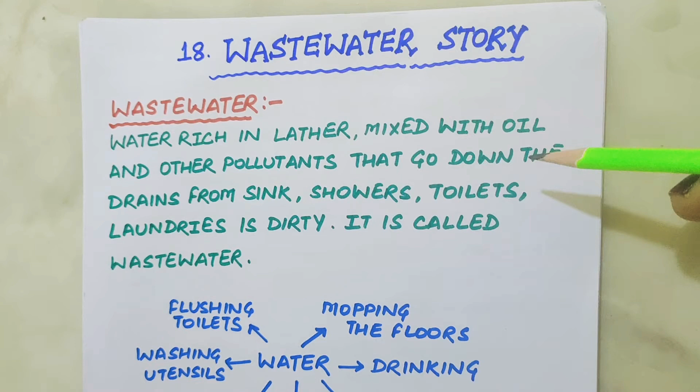Good morning, everyone. Today we are going to discuss chapter 18 of your science book, Wastewater Story.

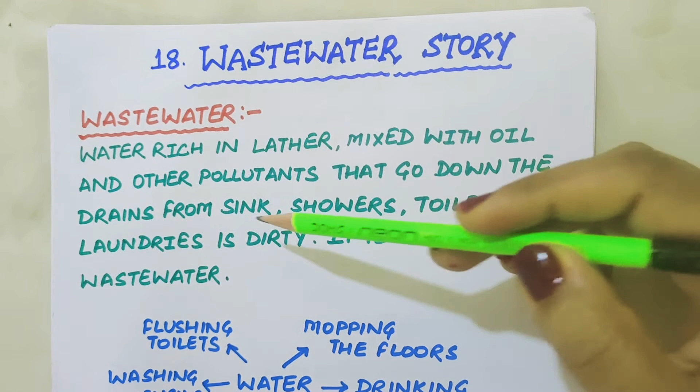As you know, water plays a very important role in our life. We all use water, and in the process of using it, we make it dirty. The water rich in lather mixed with oil and other pollutants that goes down the drains from sinks, showers, toilets and laundries is dirty, and it is called wastewater.

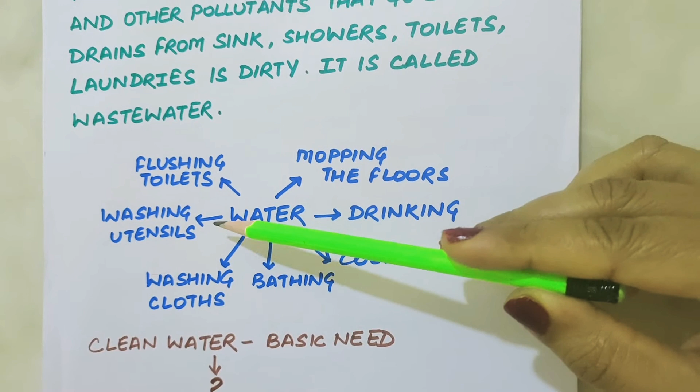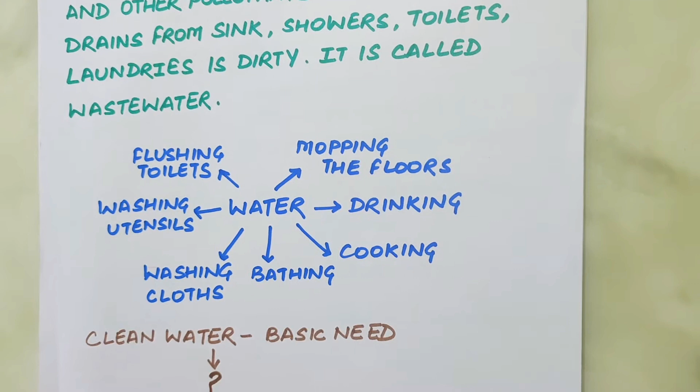We use water every day for drinking, bathing, cooking, washing clothes, washing utensils, flushing toilets and mopping. We cannot think of our life without water. We use lots of water daily, which is passed on to the drainage system every day. Water is needed by all forms of life, and clean water is a basic need of human beings. But unfortunately, clean water is not available to a large segment of the human population.

The water which is unfit for human consumption becomes the source of many waterborne diseases, which ultimately leads to loss of human life. It is estimated that 1 billion human beings do not get safe drinking water. So, realizing the urgency, we celebrate 22nd March as World Water Day to bring awareness amongst people for safe water which is fit for human consumption.

On World Water Day, that is 22nd March 2005, the General Assembly of the United Nations proclaimed the period 2005 to 2015 as the International Decade for Action on Water for Life. All efforts made during this decade aim to reduce by half the number of people who do not have access to safe drinking water. So, cleaning of water should be done before it is used again.

So, what do you mean by cleaning of water? It is the process in which the pollutants are removed from the water before the water reaches a water body or before it is used again. This process is also called sewage treatment.

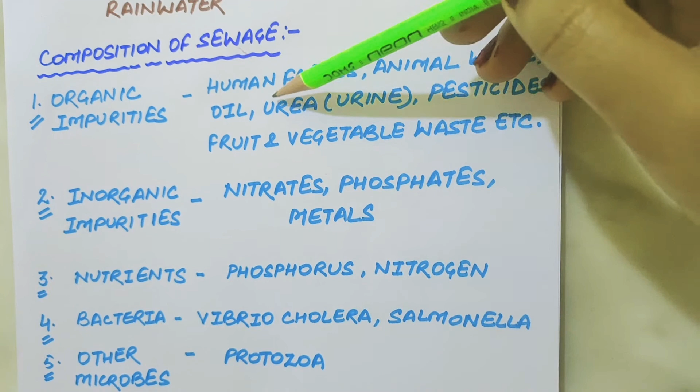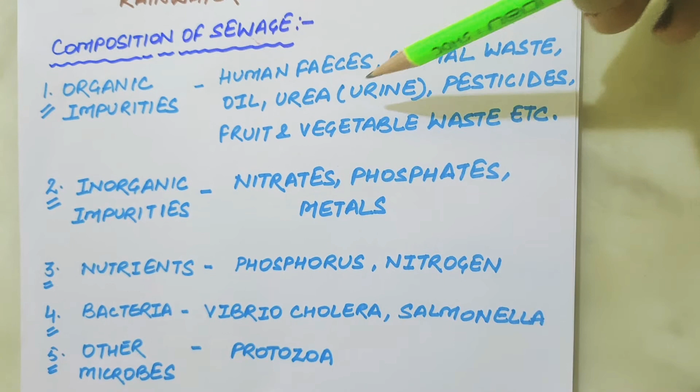Let's have a look at the composition of sewage. The following components make up sewage. The organic impurities present in sewage are human excreta, animal waste like animal dung, urea as present in urine, oil, fruit and vegetable waste, pesticides and herbicides. The inorganic impurities present in sewage are nitrates, phosphates and metals.

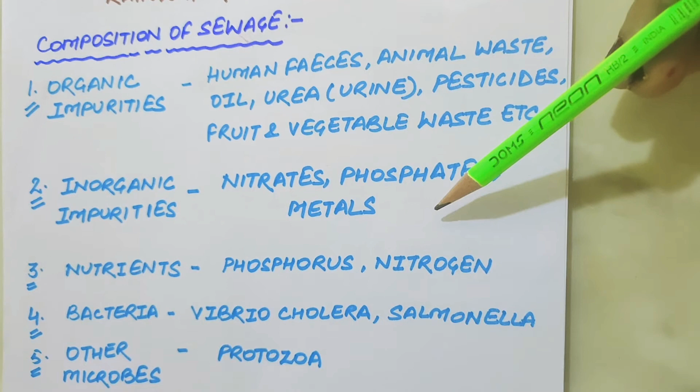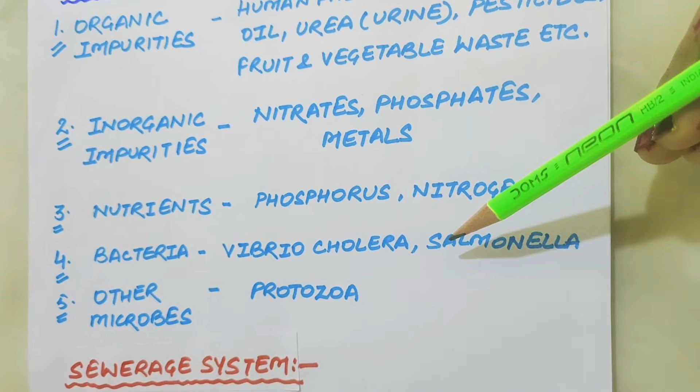The nutrients present in sewage are phosphorus and nitrogen. The bacteria present in sewage include those bacteria which cause waterborne diseases such as cholera and typhoid. Other microbes present in sewage are protozoa, which cause a waterborne disease called dysentery.

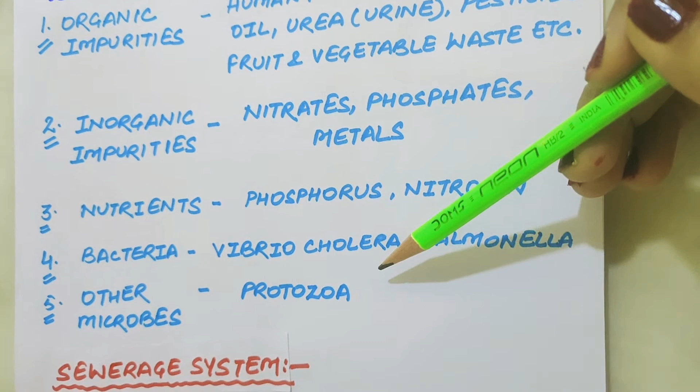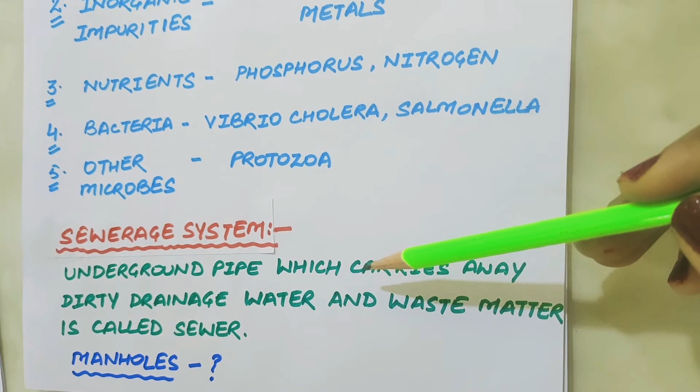Do you know what a sewerage system is? In a house there are generally two sets of pipes. One set of pipes brings clean drinking water into the house and the other set takes away wastewater from the house. For proper sanitation, a well-maintained sewage system is required.

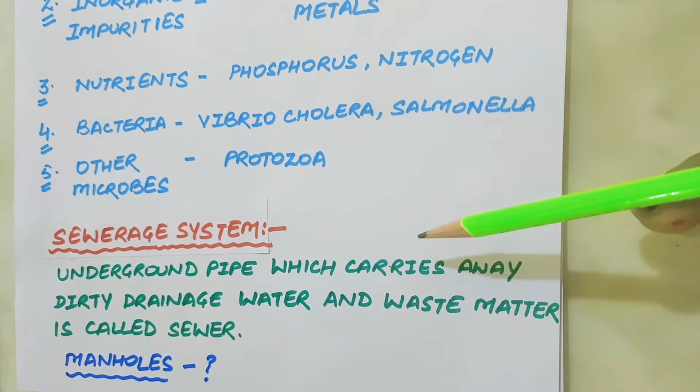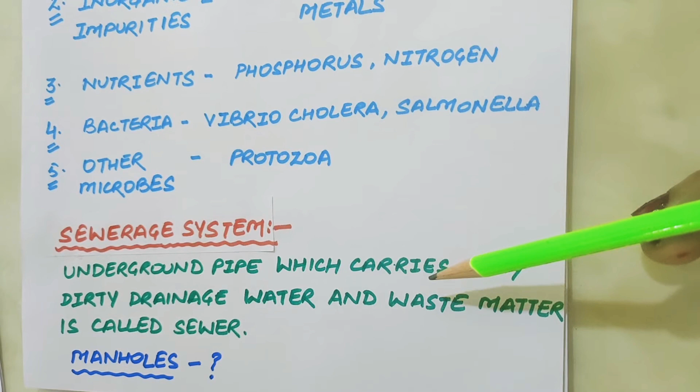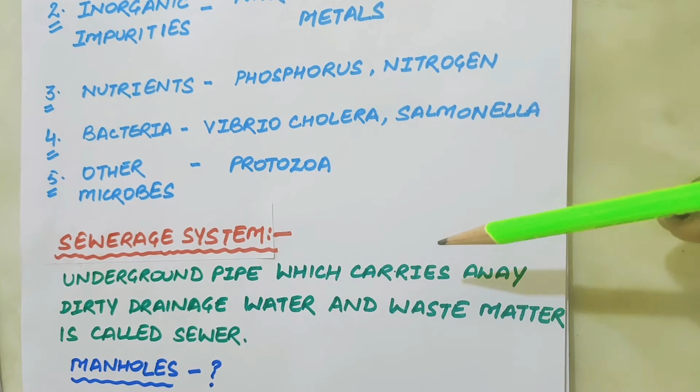The pipes which carry away wastewater or sewage from houses and other buildings are buried under the ground. An underground pipe which carries away dirty drainage water and waste matter is called a sewer. The provision of drainage at a place by laying sewers under the ground is called sewerage. Actually, sewerage is an underground network of interconnected pipes called sewers that carries the sewage from the place where it is produced to the sewage treatment plants where it is processed.

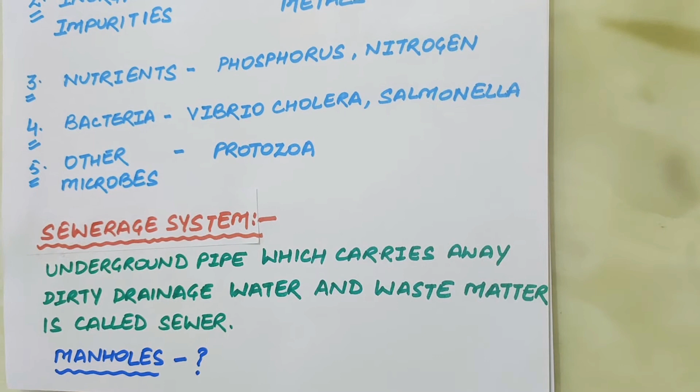Do you know what manholes are? A manhole is a covered vertical hole in the ground, pavement or road above the underground sewer pipeline through which a worker can go down to the sewer pipes for inspection, cleaning, etc.

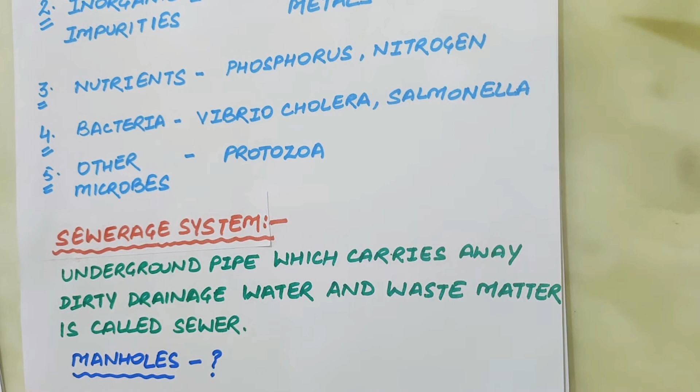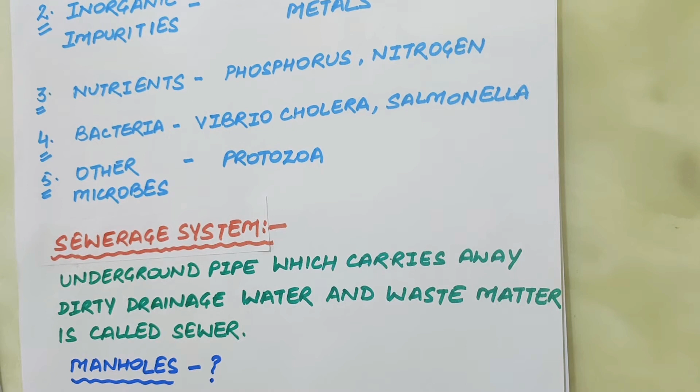Manholes are provided at every 50 to 60 meter distance in the main sewer pipelines. Manholes are also provided at the junction of two or more sewers and at points where there is a change in the direction of the sewer line.

Treatment and processing of wastewater is done in a WWTP, that is, a wastewater treatment plant. By performing a simple activity, we can understand the processes that take place at the wastewater treatment plant. We will take a glass jar 3/4 full of water, in which we will add some dirty organic matter, and label it as before treatment sample 1.

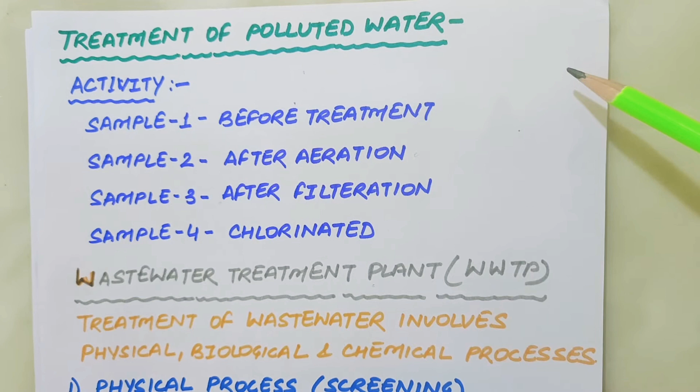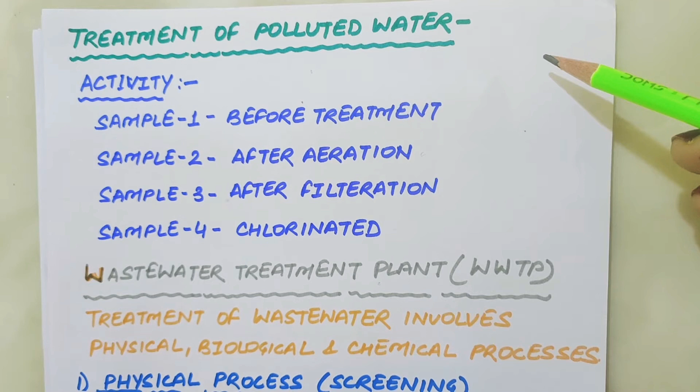In the next step, we will use an aerator from the aquarium to bubble air through the sample in the glass jar and label it as after aeration sample 2. Next, we will filter sample 2 with the help of filter paper and label it as after filtration sample 3. And in the final step, we will add a piece of chlorine tablet and label it as chlorinated

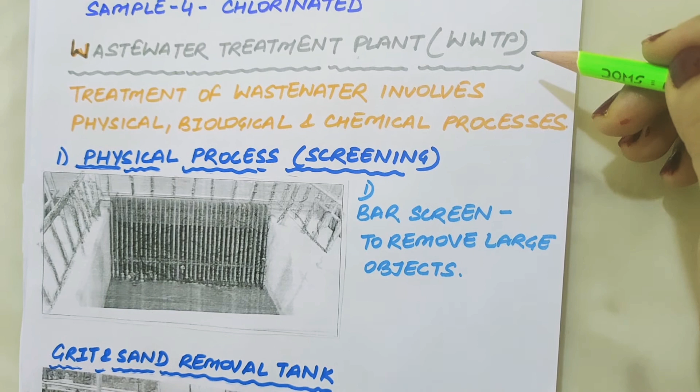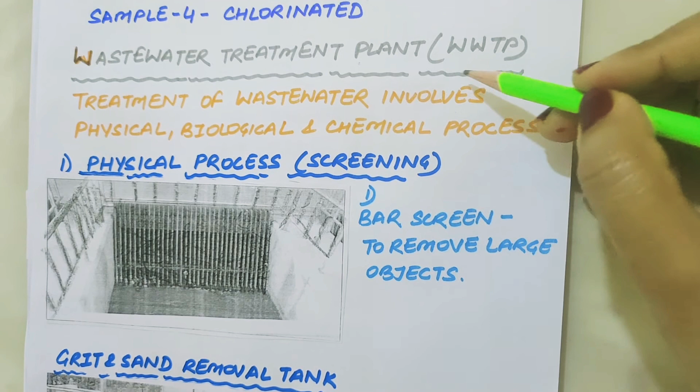sample 4. And by following these basic steps, that is aeration, filtration and chlorination, we can treat the polluted water and make it clean. Now let us discuss something about wastewater treatment plant. A place where wastewater or sewage from houses and other buildings is brought for processing is called wastewater treatment plant. And treatment of wastewater involves physical, biological and chemical processes depending on the nature of contaminants.

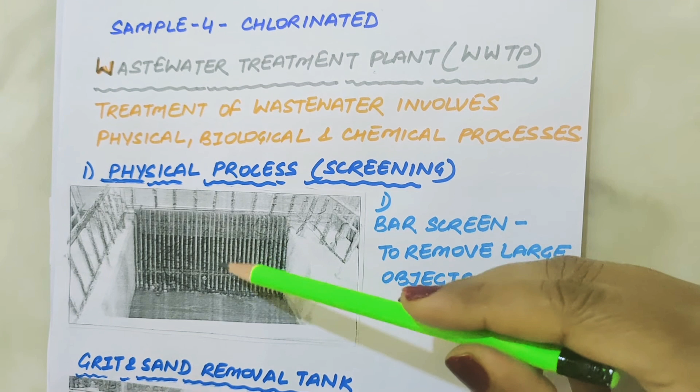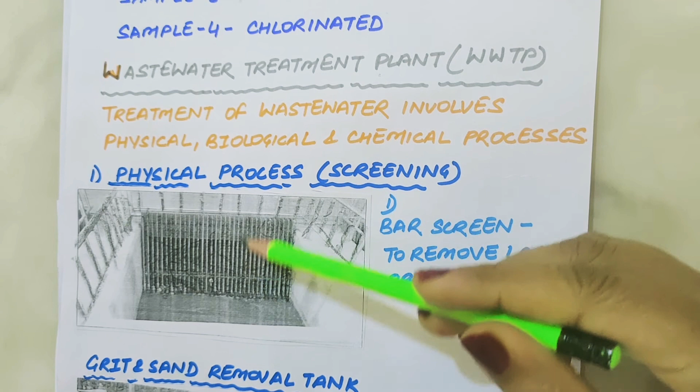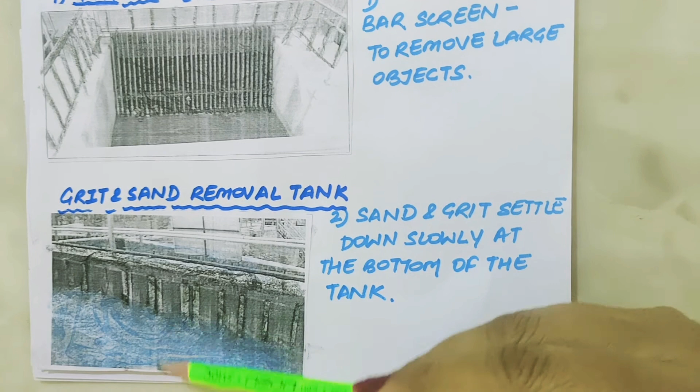First is physical process, that is screening. The bar screen first removes the large rubbish objects like rags, sticks, cans, poly bags, napkins, sanitary towels, etc. from the wastewater. After passing through the bar screen, wastewater is taken to the tank called grit and sand removal tank. In this, sand and grit settle down at the bottom of the tank as water passes slowly through the tank. The settled sand and impurities are removed from the tanks from time to time.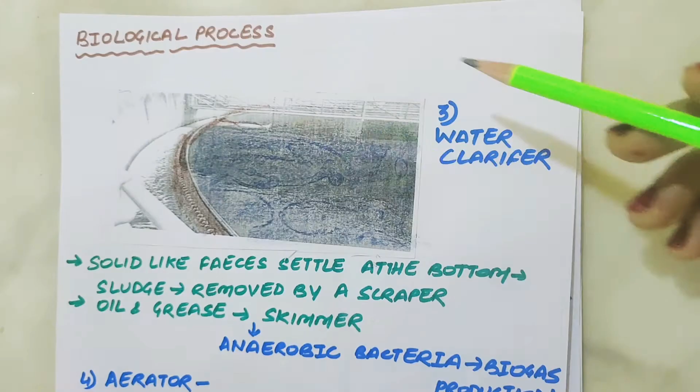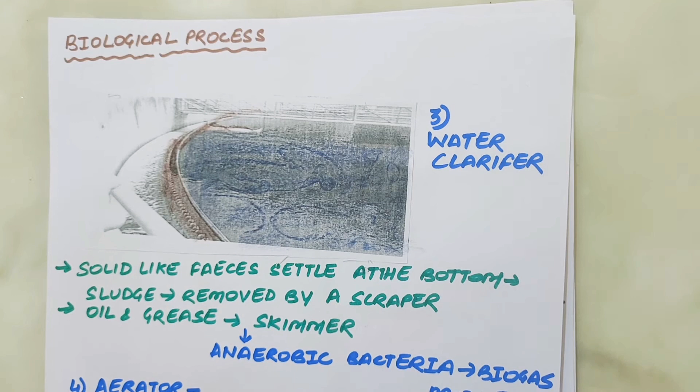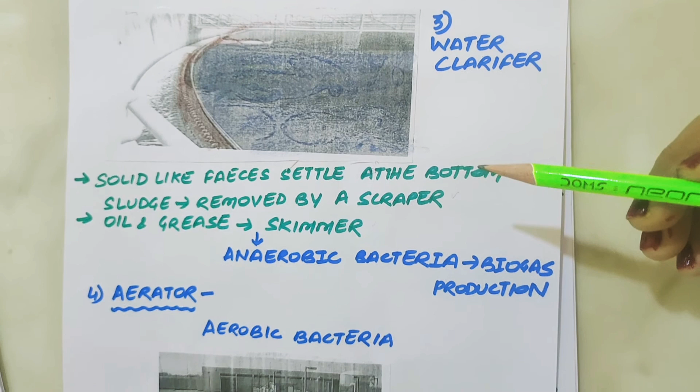Now the water settles in the tank called water clarifier, which is sloped in the center. This lets the solid like material settle at the bottom, and that solid material is called sludge. The sludge is then separated from the water with the help of a scraper. Substances like oil and grease are removed with the help of a skimmer as they float above the water. In this step, clarified water is obtained. The sludge so obtained is passed into the tank where anaerobic bacteria can decompose it and produce biogas. The biogas can be used as fuel.

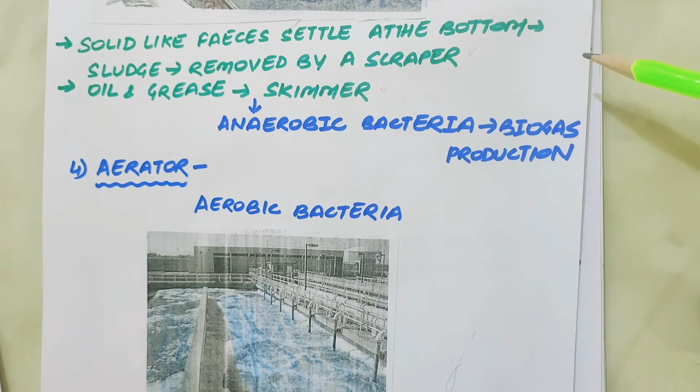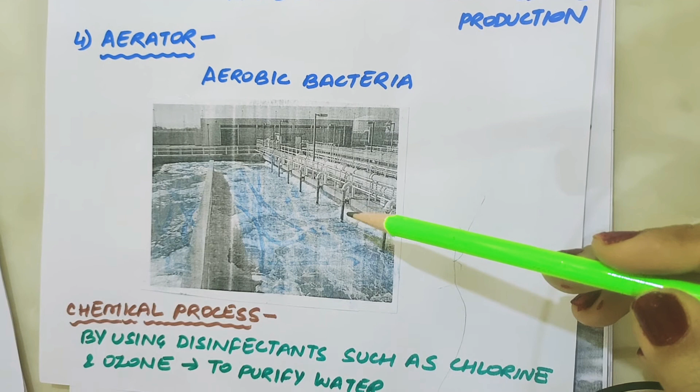The clarified water also needs to be cleaned further. Hence, it is moved to the aerator that pumps air into it. This allows aerobic bacteria to grow in the water. The aerobic bacteria consume organic waste, soap, food waste and other elements that remain in the clarified water. This water is allowed to settle for several hours and then these waste materials settle down in the tank. And this is called activated sludge.

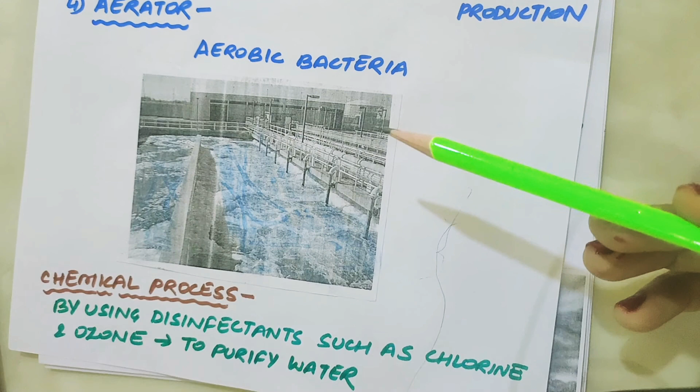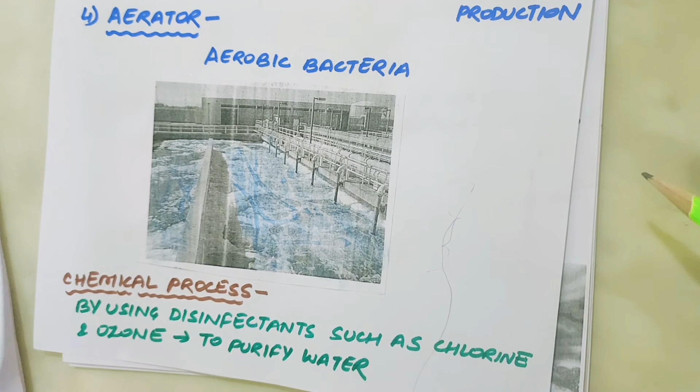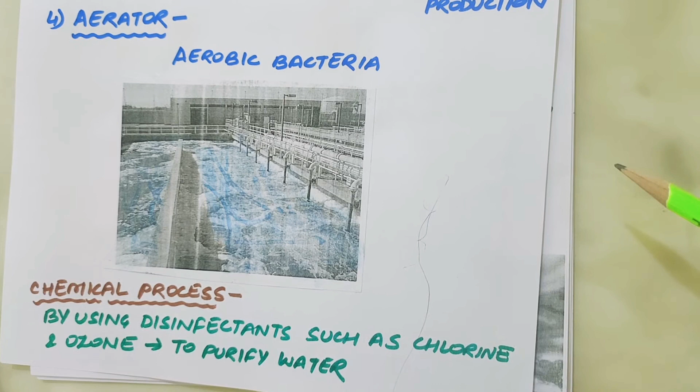The water is removed from the top of the sludge with the help of machines or sand drying beds. The sludge is then dried and can be used as manure. This treated water contains fewer impurities and suspended matter. This water is safe to dump into the water body or under the ground. Hence, it is then discharged into sea, river or underground. Nature further cleans it up.

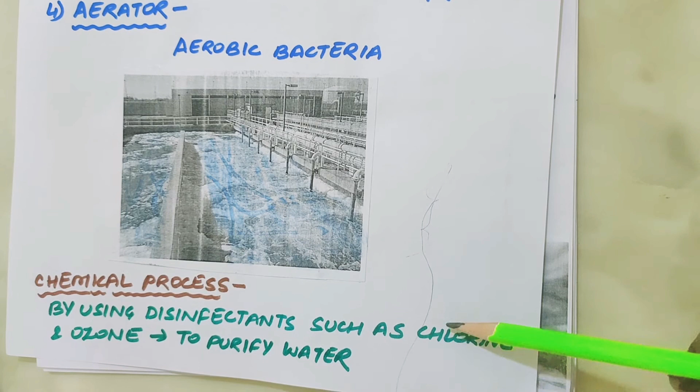Next is chemical treatment of wastewater. Sometimes harmful chemicals can be present in the water even after treating them physically and biologically. These chemicals are therefore removed by using disinfectants such as chlorine and ozone. Often chlorine gas and ozone gas are also introduced in this water, which purifies it chemically.

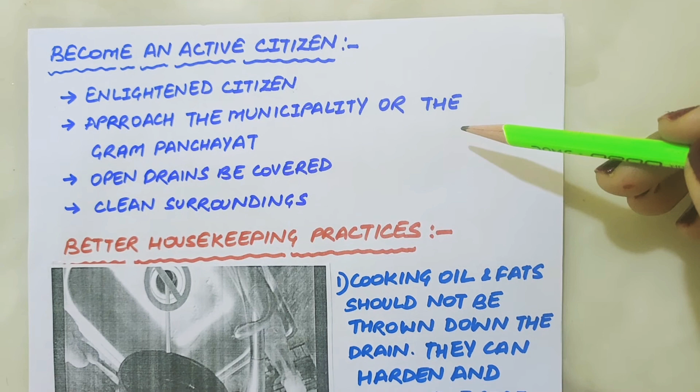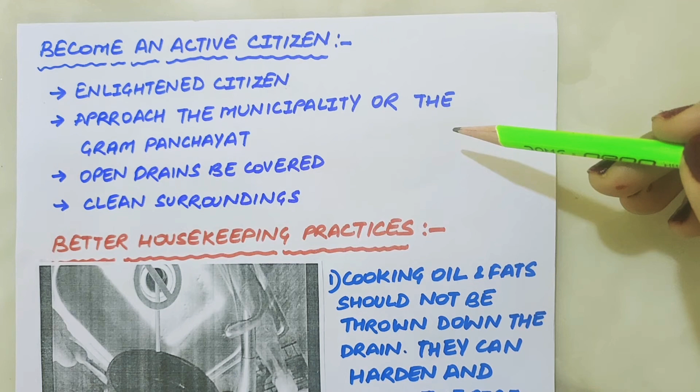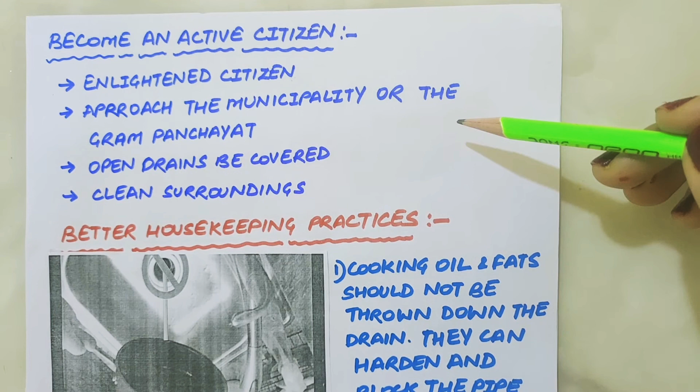Waste generation is a natural part of human activity, but we can limit the type of waste and quantity of waste produced. Often we have been repelled by an offensive smell. The sight of open drains is disgusting. The situation worsens in the rainy season when the drain starts overflowing. We have to wade through the mud pools on the roads. Most unhygienic and unsanitary conditions prevail. Flies, mosquitoes and other insects breed in it.

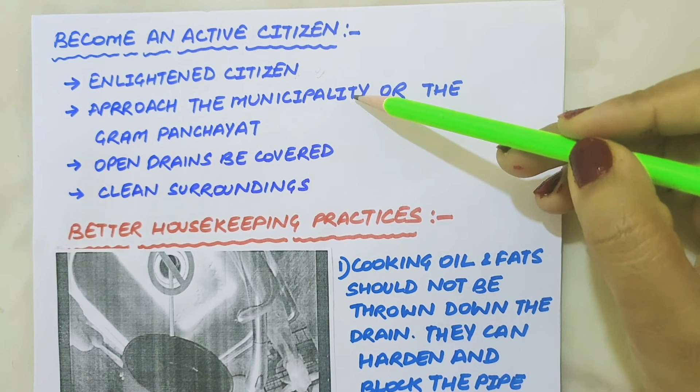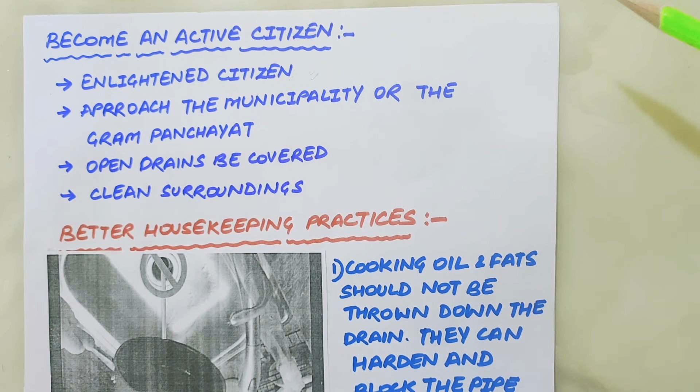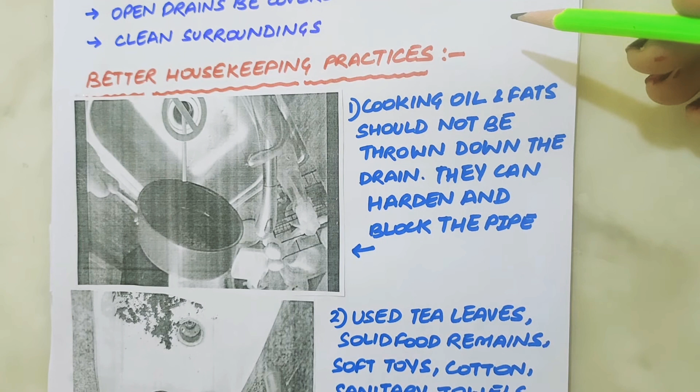We should be enlightened citizens and approach the municipality or Gram Panchayat. We should also insist that open drains should be covered. If the sewage of any particular house makes the neighborhood dirty, we should request them to be more considerate about others' health. So be an active citizen. We can use some better housekeeping practices also. We must minimize and manage waste at our home before its disposal in the following manner.

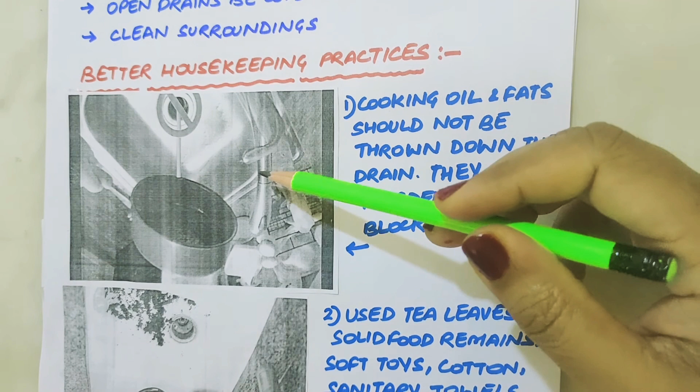Cooking oil and fat should not be thrown down the drain. They can harden and block the pipe. In an open drain, the fats clog the soil pores, reducing its effectiveness in filtering water. So throw oil and fats in the dustbin.

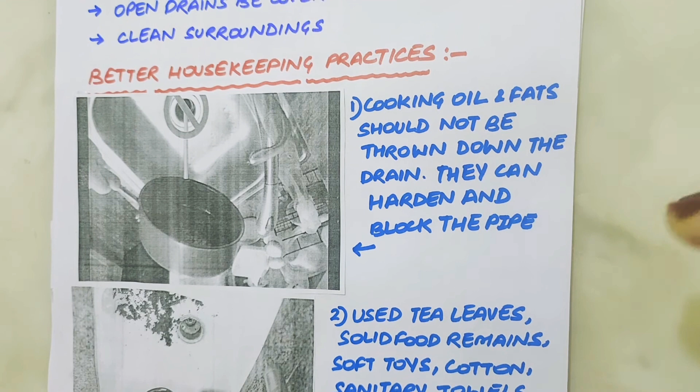Used tea leaves, solid food remains, soft toys, cotton, sanitary towels, etc. should also be thrown in the dustbin. These wastes choke the drains. They do not allow the free flow of oxygen, and this hampers the degradation process. The chemicals like paints, solvents, insecticides, medicines, and motor oil should not be thrown in the drain, as they kill helpful microbes which digest the organic waste.

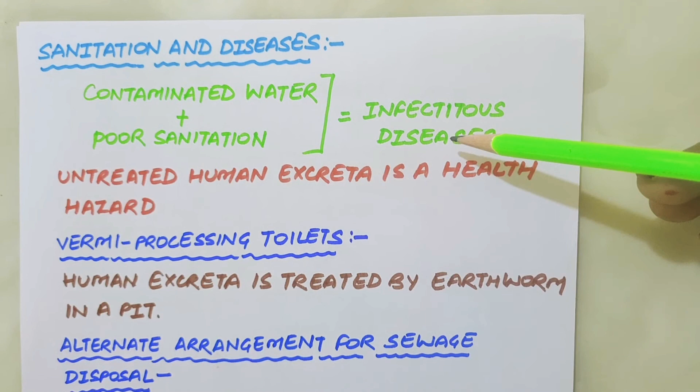Next is sanitation and disease. Contaminated water and poor sanitation practices are the major cause of infectious diseases in our country. Safe sewage disposal facilities are still not available in many cities and villages in India, so people go to open places and defecate.

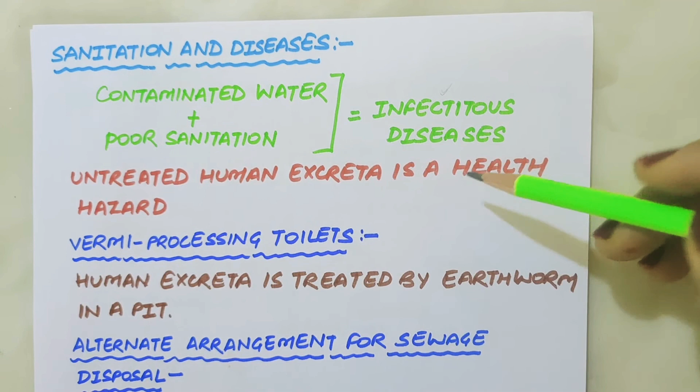This causes an increase in the insect vector population which transmits diseases like cholera and typhoid. Untreated human excreta is a health hazard which causes soil and water pollution. River water and groundwater are sources of drinking water for many people, so contaminated water can spread many diseases, especially waterborne diseases.

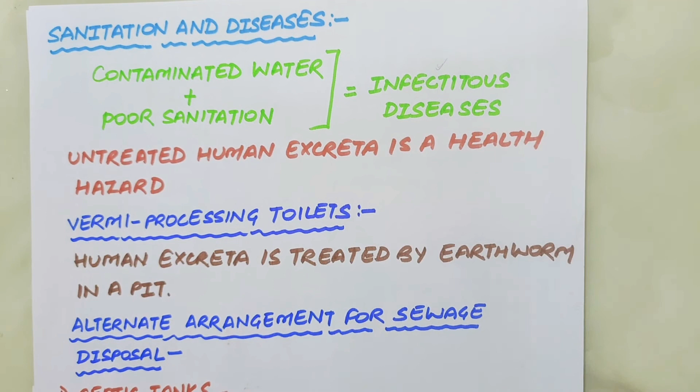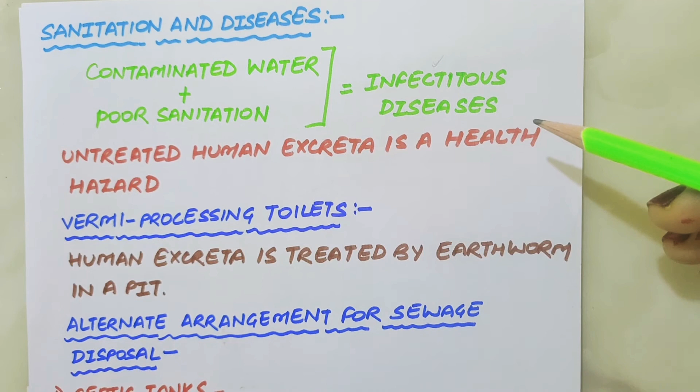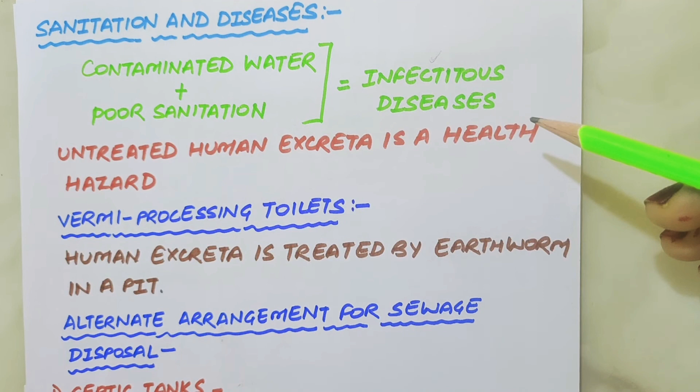We can also use vermi-processing toilets. In these toilets, human excreta is treated by earthworms in a pit. The earthworms eat up all the organic matter present in human excreta and turn it into compost. These are low water use toilets for the safe processing of human waste, and the excreta is completely converted into vermi cakes, a resource much needed for soil.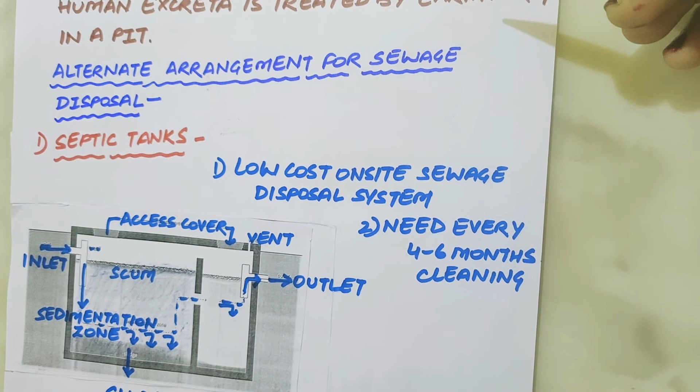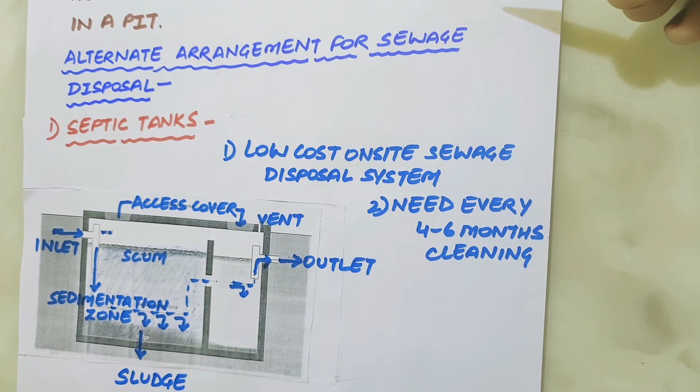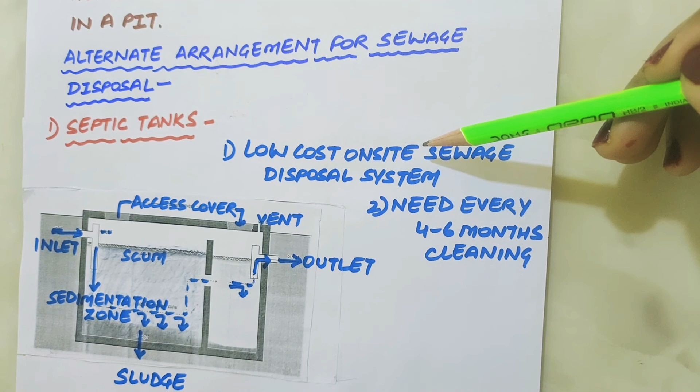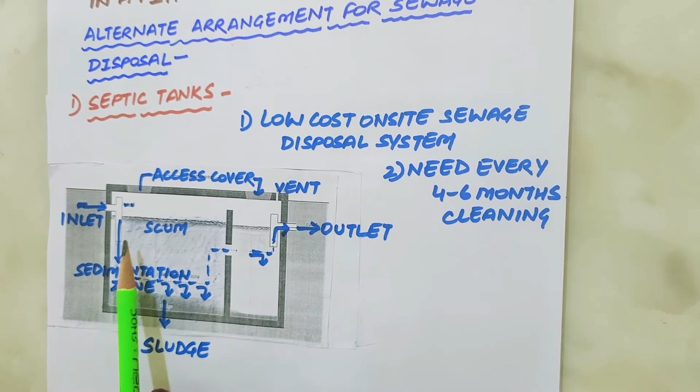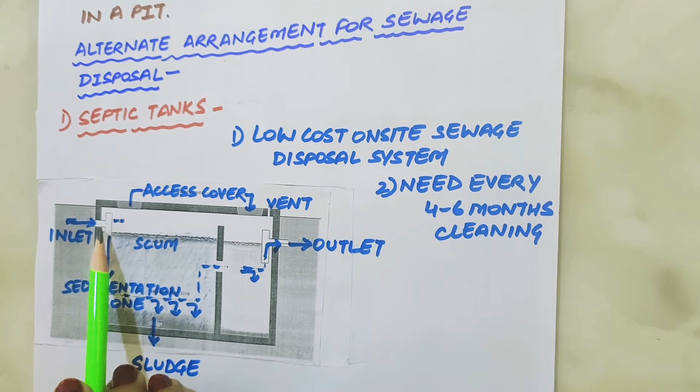A septic tank usually consists of a big covered underground tank made of concrete, having an inlet pipe at one end and an outlet pipe at the other. The toilet seat is connected to the inlet pipe. Human excreta from the toilet seat enters the septic tank through the inlet pipe, and the solid part of the excreta keeps collecting at the bottom in the form of sludge.

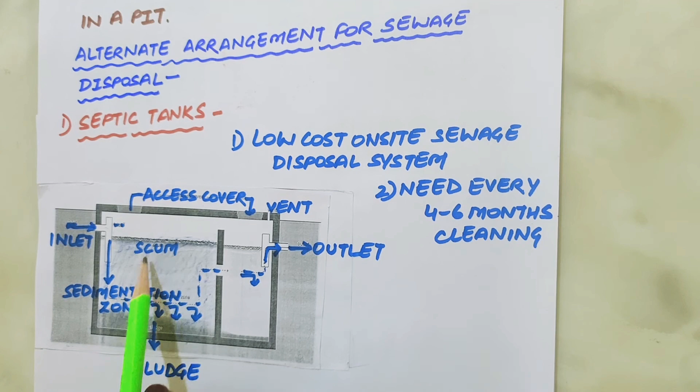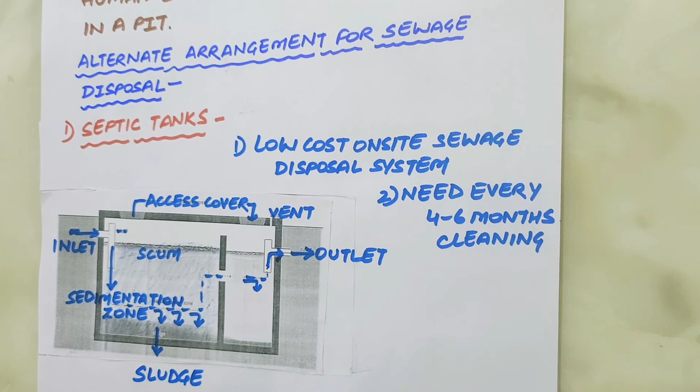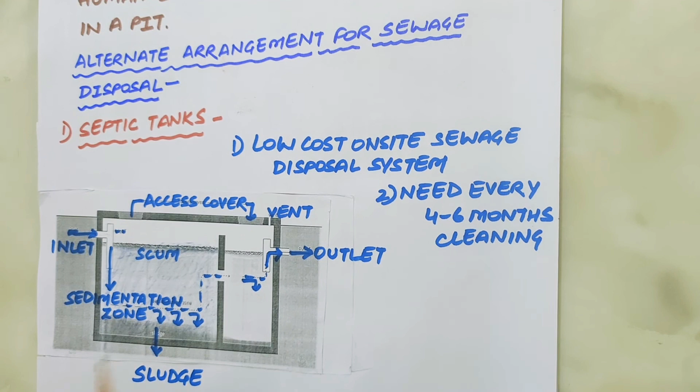The watery waste remains above it. Anaerobic bacteria break down most of the solid organic matter present in the human excreta, reducing the volume of solid waste greatly. The digested solid waste keeps depositing at the bottom of the septic tank, and the watery waste is also cleaned by anaerobic bacteria. The excess water goes out of the septic tank through the outlet pipe and gets absorbed into the soil.

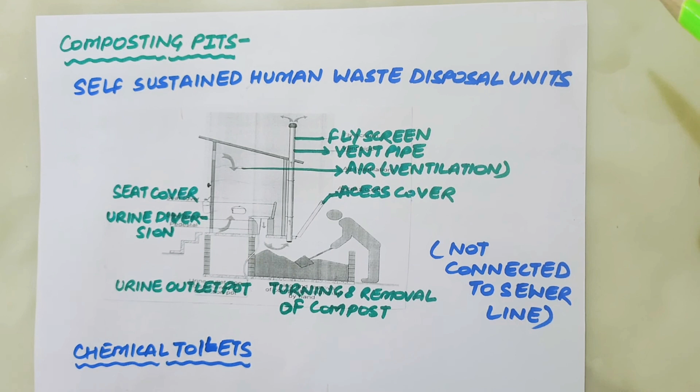Composting pit is another alternate arrangement for sewage disposal. These are self-sustained human waste disposal units which are not connected to a sewer line or a septic tank. A composting toilet breaks down and dehydrates human waste into compost.

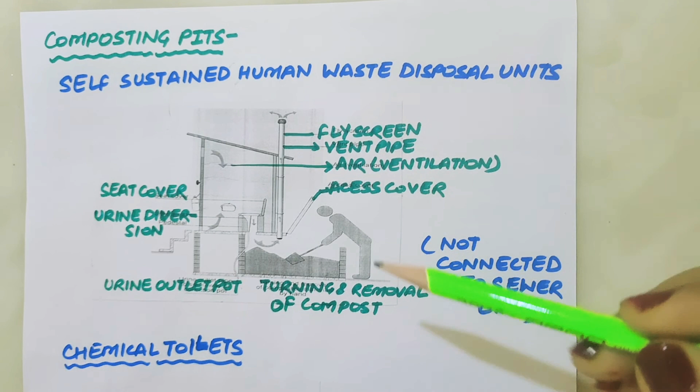Next is chemical toilets. These toilets have limited storage capacity for human waste and need not be emptied periodically. They use a chemically treated reservoir located just below the toilet seat. The chemicals reduce the foul smell coming from human excreta and carry out partial disinfection of human waste.

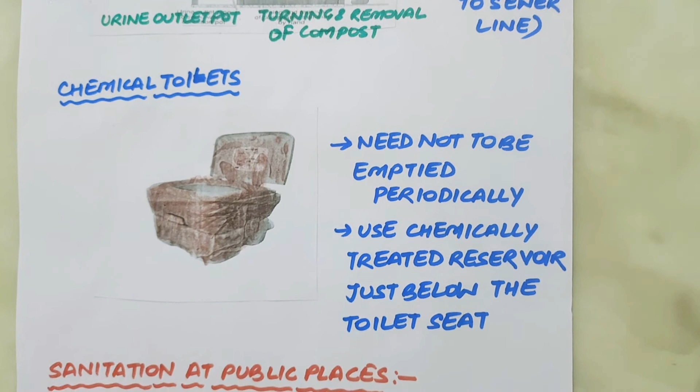Sanitation at public places is also very important. In our country, fairs are organized periodically and a large number of people participate in them. Similarly, railway stations, bus depots, airports, and hospitals are very busy places. Thousands of people visit them daily, which generates a large amount of waste. It must be disposed of properly, otherwise epidemics could break out.

The government has laid down certain standards of sanitation, but unfortunately they are not strictly enforced. We should not scatter litter anywhere. If there is no dustbin in sight, we should carry the litter home and throw it in the dustbin.

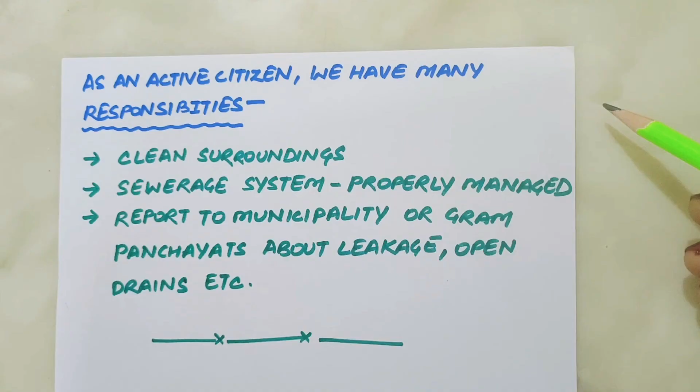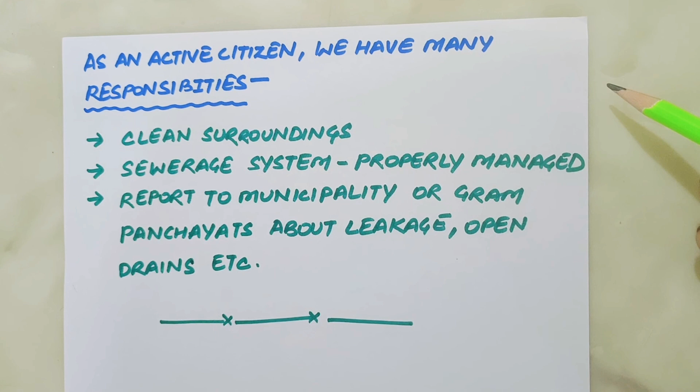We all have a role to play in keeping our environment clean and healthy. We must realize our responsibility in maintaining water sources in a healthy state. Adopting good sanitation practices should be our way of life. As an agent of change, our individual initiative will make a great difference. Influence others with our energy and ideas.

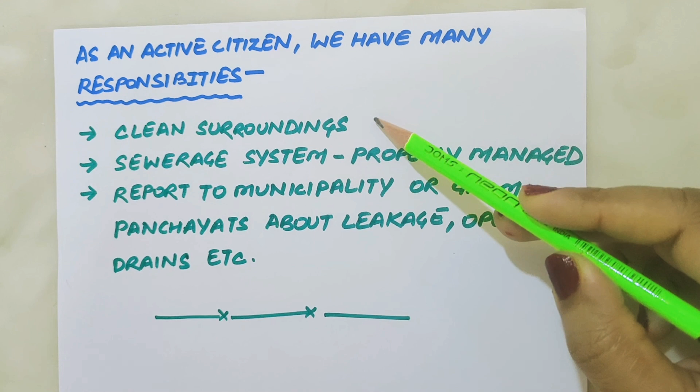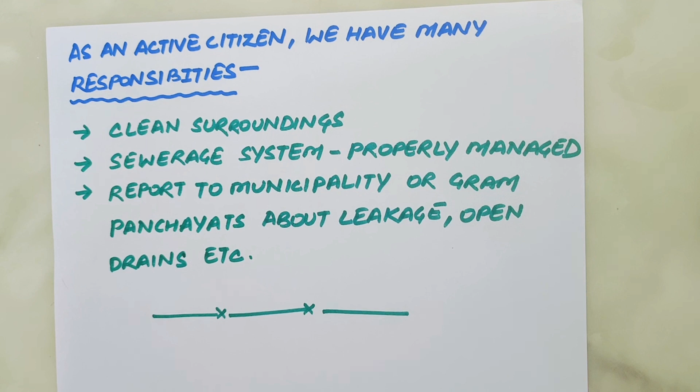As an active citizen, we have many responsibilities regarding sanitation: to ensure that our surroundings are clean, and that the sewage system in our house is properly managed. If any leakage or open drain in the sewerage system is present, it should be reported to the municipality or Gram Panchayat, insisting that the open drain be covered properly, so that several air and waterborne diseases can be prevented. I want assurance from you all that you will definitely play your role as an active citizen.

So this is all about the waste water story. Thank you very much.